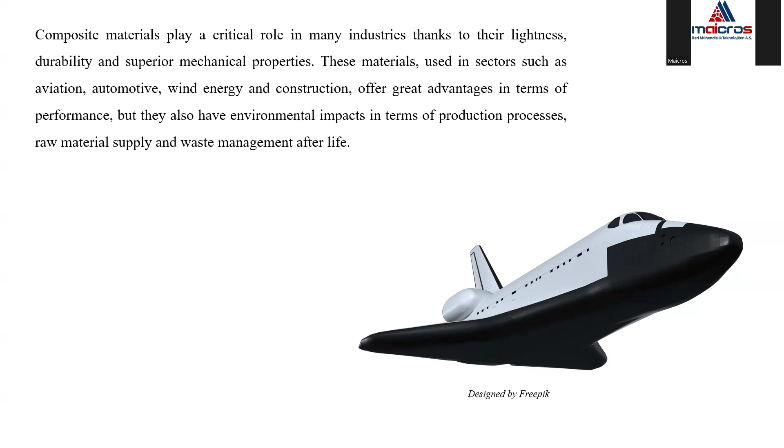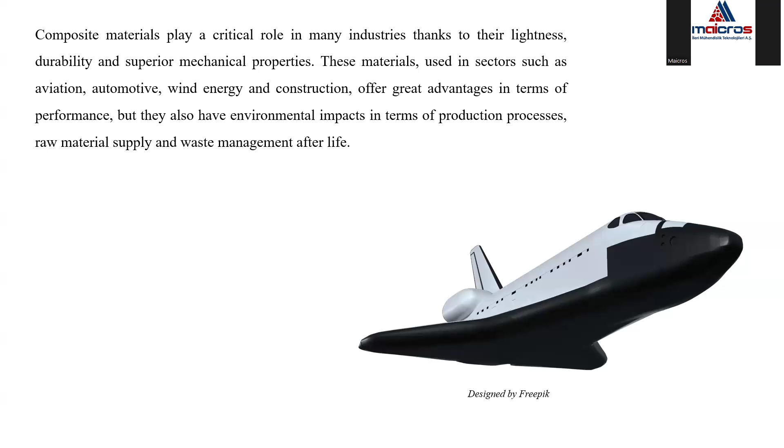So we know that the composite materials play a critical role in many industries due to their superior properties such as lightness, durability, and some good mechanical properties. So composite materials can be used in many sectors, including aviation, automotive, wind energy, and construction. So they can provide many advantages in terms of their performance, and at the same time they have some environmental impacts such as other conventional materials.

So when we talk about sustainability, we know that the sustainability is gaining importance in every field of industry today. The composite industry must also keep up the latest changes in the industry. And at the same time, circular economy aims to minimize waste production and optimize the raw material use by increasing the resource efficiency. And on the other hand, there are some regulations such as Carbon Border Adjustment Mechanism (CBAM) developed by the European Union, and that regulation necessitates the integration of policies that aims reducing the carbon footprints into the industry.

So in this webinar, we will examine the relationship between the composite industry and the sustainability and how these concepts such as circular economy, resource efficiency, and CBAM can create some changes or transformation in the composite industry. So if you look at the composite materials, there are many sectors, as mentioned before, that these materials can be used. One of the sectors is automotive industry.

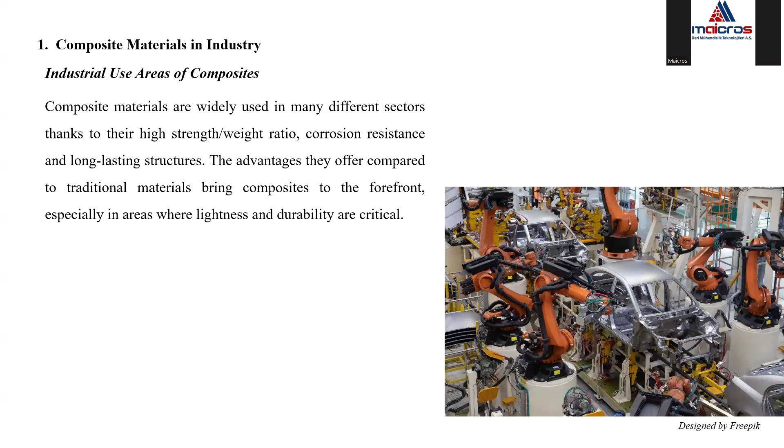When we compare the composite materials to traditional materials in terms of weight, we see that the composite materials are lighter since they have lower density, and they have higher specific strength compared to steel and aluminum alloys. And they have better resistance to corrosion. That's why they have lower maintenance costs. But the conventional materials will require coating and maintenance against corrosion. When we compare the production cost of the composite materials to conventional materials, we see that the composite materials will need higher initial investment cost, but since they require less maintenance, let's say, they could be advantageous in the long term.

So in terms of formability, the conventional materials, since they're metals and alloys, are easier to shape, but in terms of complex geometries, we can say that composite materials are better to be formed into the complex geometries. And we compare the recycling property of the composite materials and traditional or conventional materials. We see that the conventional materials are easier to recycle. Composite materials are more difficult to recycle, but with the developing technological methods and capabilities in the future, composite materials could also have some advantages in terms of recycling, such as conventional materials.

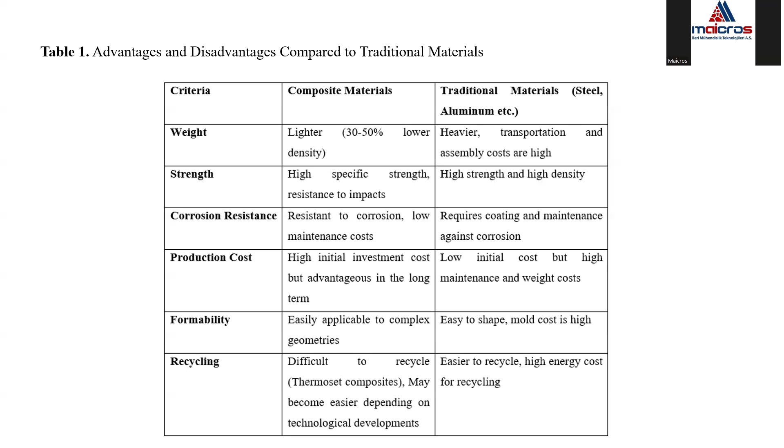So sustainability, why is sustainability important in the industry? The rapid development in the industry brought some global problems such as depletion of natural resources, environmental pollution, and climate change. So that's why it becomes a necessity, a requirement to make some progress on the processes that will be less harmful to the environment. That's why the concept of sustainability and the applicable models in the industry towards sustainability would be a good choice

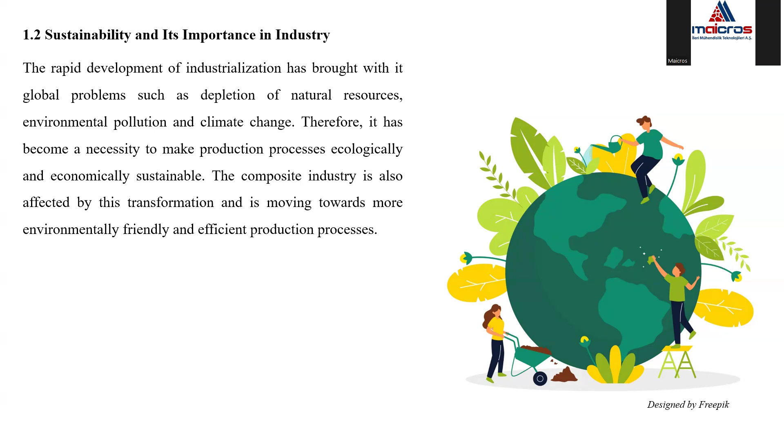to do that. So when we look at sustainability, we can define sustainability as an approach that aims to meet today's needs while ensuring future generations access to resources, which means that we will use the sources, but it may not negatively impact the resources of the future generations. Normally it has three main pillars or three dimensions: environmental dimension, economic dimension, and social dimension.

When we look at the environmental dimension, things about natural resources, reducing carbon emission, and waste management are the things that can be mentioned in the environmental dimension. In the economic dimension, we can talk about resource efficiency and long-term profitability of the processes or the materials, cost optimization, green technology investments. These are the things that can be defined in the economic dimension.

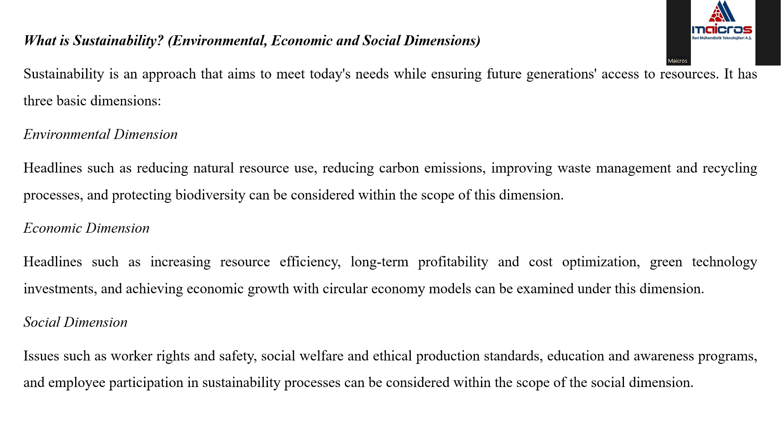And for the social dimension, issues such as worker rights, safety, and some ethical problems or ethical issues can be mentioned in the social part of sustainability.

So what are the critical points in terms of sustainability in composite production? Even though composite material production provides higher durability and longevity compared to traditional materials, it faces some critical issues, such as raw material use and alternative materials. This part includes using bio-based resins instead of fossil-based resins, evaluating renewable fibers such as flax, bamboo fibers, etc., and integrating recycled composite materials into production. So these parts are related to raw material use.

And the other category in the critical points is energy and water efficiency in the production processes. So using low energy alternatives instead of energy intensive processes, such as using resin transfer molding compared to autoclave processes in the composite industry, or a closed loop cooling system compared to an open loop cooling system in terms of water efficiency.

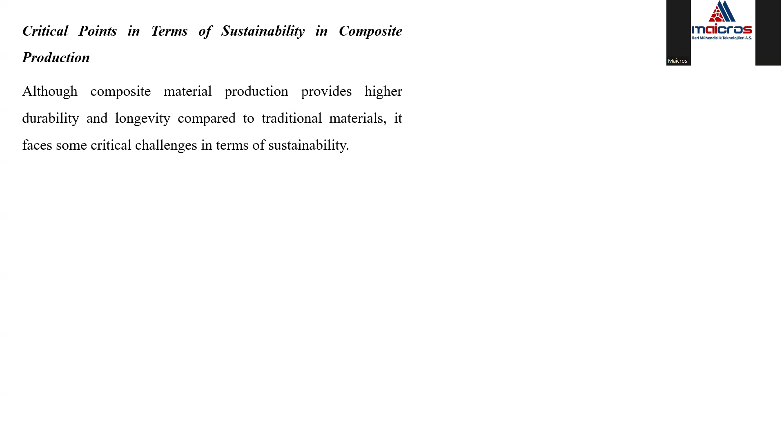So we can say that sustainability is one of the most important concepts, and it shapes the future of the industry in many areas. As part of this transformation, the composite industry must adapt circular economy models, reduce environmental impacts, and also increase resource efficiency at the same time.

So when we look at the circular economy and resource efficiency concept, we can say that industrial production has remained dependent on the linear economy model, based on the logic take, produce, and throw away, for many years. However, as mentioned before, the rapid depletion of natural resources, the increase in waste, and the negative impacts on the environment have revealed the need for a new economic model.

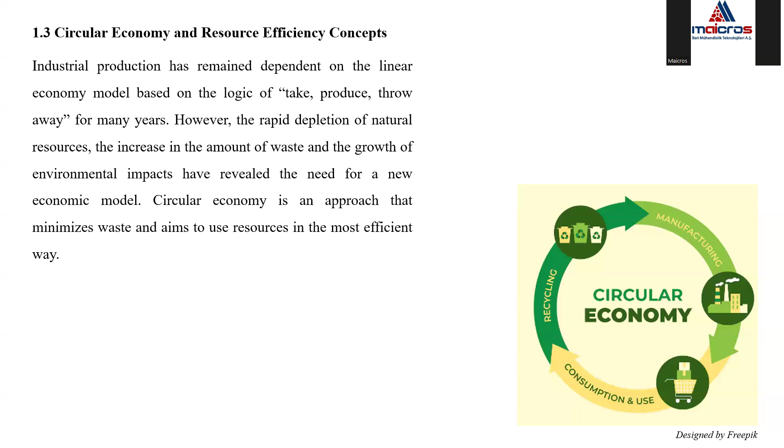So circular economy is a kind of solution offered for this purpose. It aims to minimize waste and use resources in the most efficient way. In this part, we will look at the basic principles of the circular economy, the problems of the composite industry in the current linear economy model, and how resource efficiency can be achieved in the composite industry.

So as we said before, the circular economy aims to ensure sustainability by reducing natural resource consumption, and it aims to extend the life of materials and products and integrating recycling systems. So the circular economy has three main parts. One of them is reduce, the other part is reuse, and the third part is recycle.

So for the reduce part, less raw material and energy consumption in production, design and production techniques that will minimize waste production, and preventing resource waste by using more durable and long-lasting materials. These are some parameters that can be mentioned in the reduce part.

For the reuse part, we can say that repairing products or reusing them for different purposes could be a good option, or evaluating industrial byproducts in different sectors. And making parts replaceable, for example, could be a good solution. Reusable with a modular design approach. These are some solutions for the reuse category.

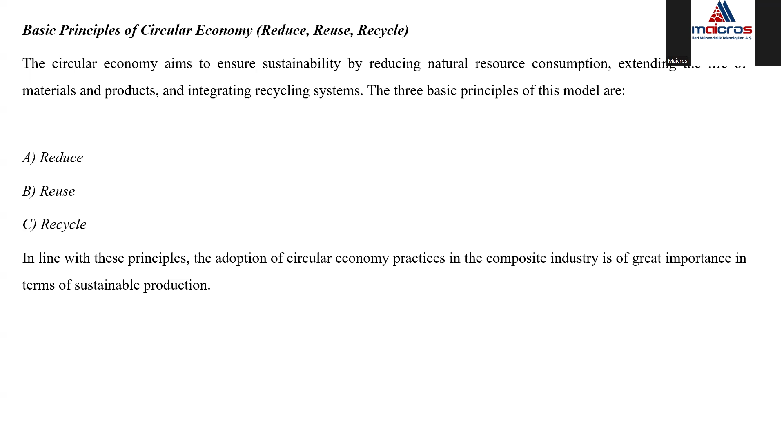And for the recycle category, reintroducing expired materials into production processes. So evaluating waste with mechanical, chemical, and thermal recycling methods, and using recycled raw materials in new products could be some possible solutions. So in line with these principles, the adoption of circular economy practices in the composite industry has utmost importance in terms of more sustainable manufacturing.

Okay, what are the problems of the linear economy model in the composite industry, as in the other sectors? So the traditional linear economy model consists of raw material extraction, then use in production, use of these products by the end users, and just waste. However, this system leads to environmental and economic problems in the long term. One of them is rapid depletion of natural resources.

For example, in the composite industry, let's say, fibers that are made of carbon, glass, or Kevlar, and resins used in composite production are generally of petrochemical origin. So dependence on fossil fuels and raw materials increases production costs.

The other problem is waste management. So thermoset composites, for example, are generally not recyclable, which results in large amounts of waste. Sustainable disposal methods are limited for now for large composite parts such as wind turbine blades or aviation components.

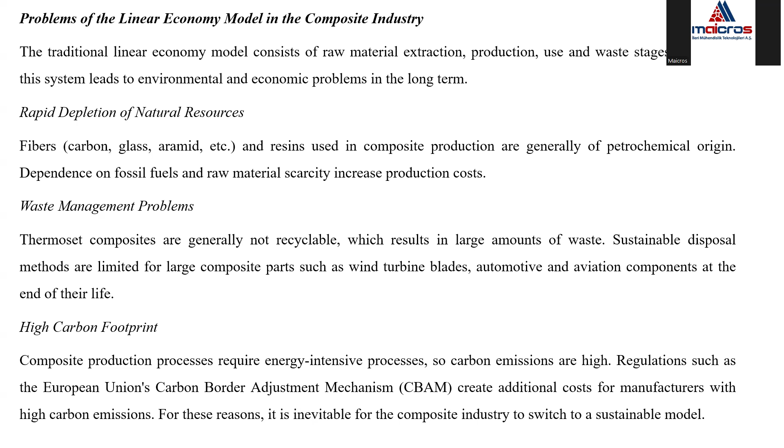The other problem with the linear model in the composite industry is high carbon footprint. So composite production needs energy-intensive processes. So carbon emissions are high. So as mentioned before, regulations such as CBAM create additional cost to production. That's why it creates a problem in the current model.

So in this part, we see that resource efficiency has critical importance, because resource efficiency aims to achieve the same or greater productivity while using less raw material. That's one of the solutions to the before mentioned problems. So increasing resource efficiency in the composite industry is important to environmental and economic sustainability.

So if we can achieve resource efficiency in the composite industry, what may happen? The cost could be reduced: since less material and energy is used, the cost of production will be reduced, and the environmental impacts will also be reduced, such as carbon emissions and waste amount. And it will be compatible with regulations such as CBAM and other sustainability-related regulations issued by the European Union.

So how to achieve resource efficiency? Some solutions could be the following. Alternative raw material use: bio-based resins could be a solution, recycled fibers. And production techniques could be more efficient, and preventing material waste with additive manufacturing, for example, could be a solution for more sustainable production.

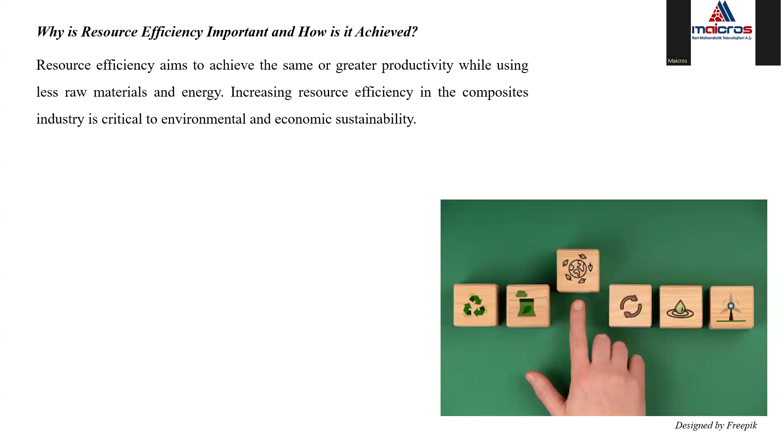So the circular economy model is a critical approach for the composite industry's transition to sustainable and efficient production. So in line with the principles of reduce, reuse, and recycle, raw material consumption should be optimized, efficiency in production processes should be increased, and waste management should be improved for better resource efficiency.

Okay, the other part is carbon border adjustment mechanism. So policies aimed at reducing carbon emission with the scope of fighting climate change are transforming global trade dynamics. One of the regulations issued by the European Union is the CBAM.

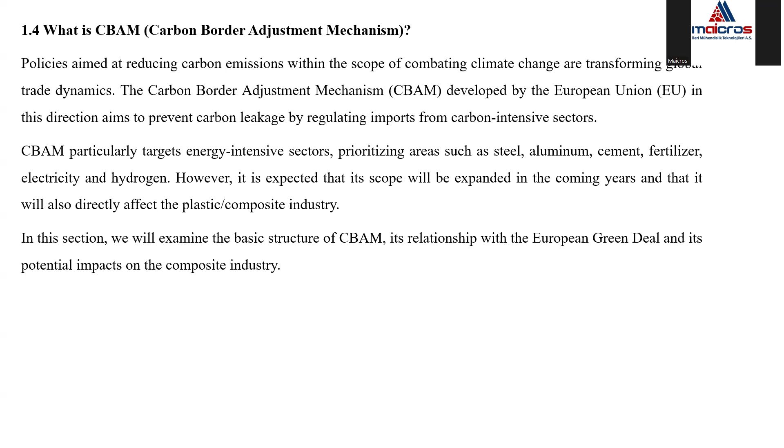So it targets basically energy intensive sectors such as steel, aluminum, cement, fertilizer, hydrogen, electricity, and stuff. But it's also expected that its scope will be expanded in the coming years, and it will also affect the plastic and composite industry at the same time. So that's why the composite industry should be prepared, transitioning to more sustainable production techniques.

And when we look at the main purpose of the CBAM, we can see that it aims to prevent carbon leakage and integrate carbon pricing into the global trading system. So what is carbon leakage? Carbon leakage is the indirect increase in total carbon emissions of companies operating in the countries with strict emission regulations by shifting their production to countries with looser environmental policies. So this case both endangers environmental goals and creates competitive inequality for companies within the European area.

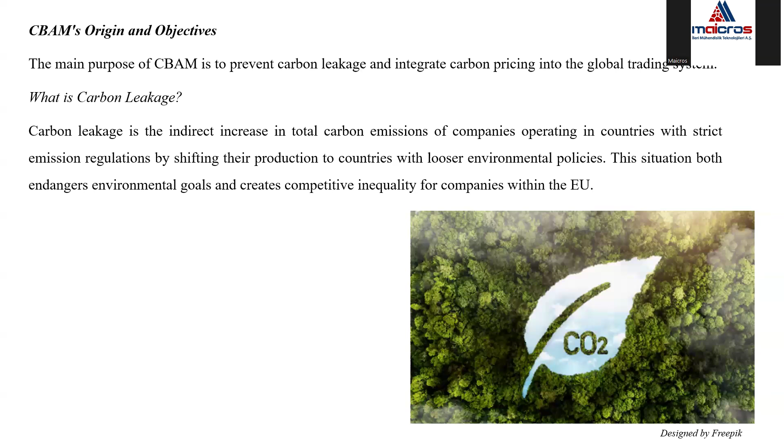So main objectives of the CBAM are to prevent carbon leakage, to ensure fair competition between companies in Europe, to encourage green transition. So basically, it aims to ensure that the producers and importers within the European area switch to low carbon production methods by imposing an additional cost depending on the carbon content of the products that are imported.

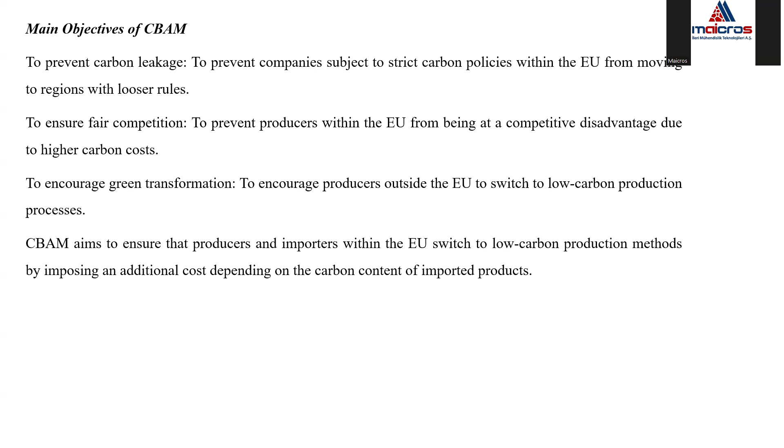So what is the relationship between CBAM and the European Green Deal? So the European Green Deal is the EU's strategic plan to become climate neutral by 2050. So in this context, various regulations are being implemented to reduce carbon emissions. So CBAM is one of the critical tools of this transformation and is linked to the European emissions trading system, which is the EU's carbon pricing system.

So the implementation process is following. Between 2023 and 2025, it's a reporting period, which means the companies will report the carbon emissions of imported products, but there will be no financial obligation yet. After 2026, the obligation to purchase CBAM certificates will begin for imports with high carbon content. So that process is expected to gradually realize the integration of carbon pricing into the industries.

Okay, then what are the possible impacts of the CBAM and related regulations on the composites industry? So currently, CBAM does not directly cover the composite sector, but it's expected to affect the composite industry due to its indirect effects and expansion in scope in the future. So raw materials such as glass fiber, carbon fiber, and resin are among the carbon intensive sectors due to their high energy consumption. So if these raw materials are included in the scope of the CBAM, which could be, import costs will increase and supply chain changes may be required for composite companies also.

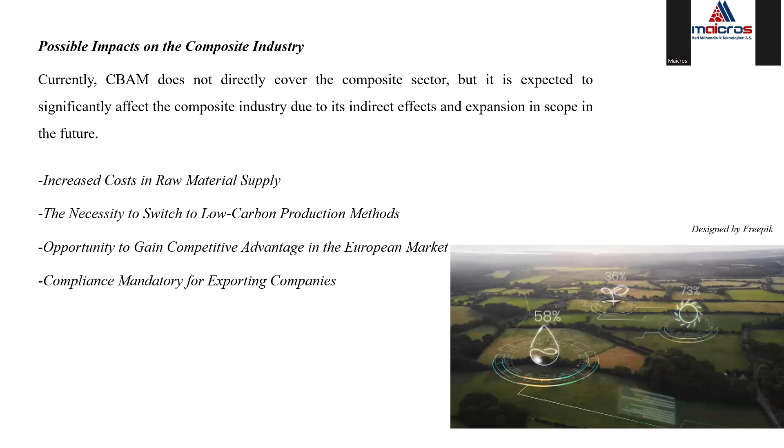So CBAM is a mechanism that makes carbon pricing mandatory in global trade and accelerates the transformation in carbon-intensive sectors. Although the composite industry is not currently directly included in the scope of CBAM, it might have significant impacts on the supply chain and production processes. Therefore, it has a great importance for composite manufacturers to use low carbon raw materials, develop recycling methods and take measures to increase energy efficiency to be advantaged in the near future in the composite industry. So that was the end of webinar one.